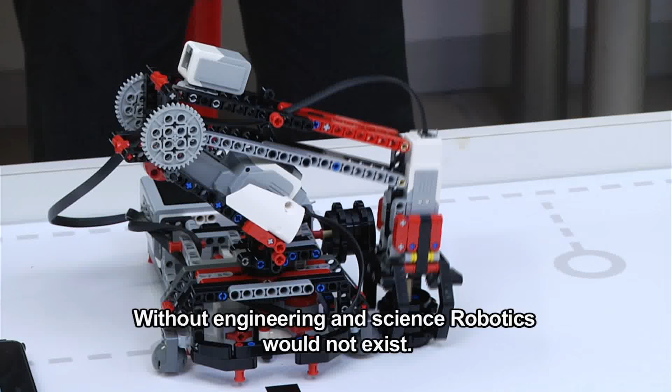Without engineering and science, robotics would not exist. Robotics includes mechanical engineering, electrical engineering, and computer science.

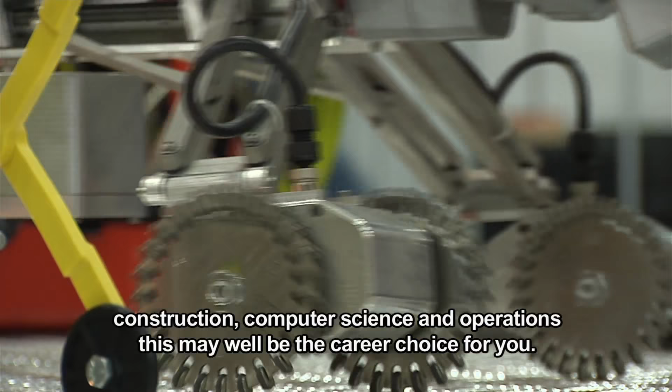Robots are used to make life safer, and yes, sometimes they do replace humans. So if you're not afraid of the future, are multi-talented and enjoy design, construction, computer science, and operations, this may well be the career choice for you.

Hi, I'm Donnie Haymans, Manager of Robotics at Hands-On Technologies.

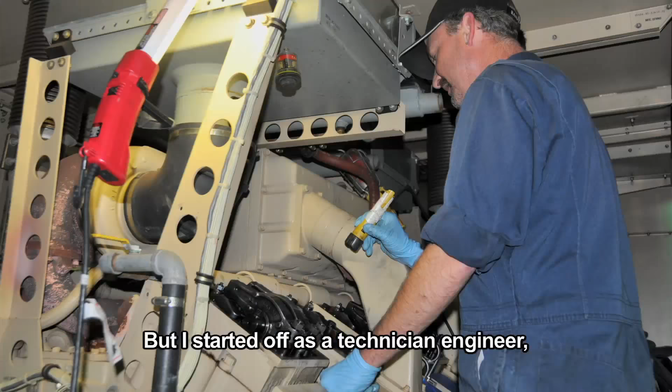Danny, how long have you been doing robotics? Okay, so I've been teaching and training robotics now for the last 6 years with Lego Education. But I started off as a technician engineer and I worked at the SABC. Then there wasn't robotics, but that was about 8 years, working on electrical equipment, cameras, videotape machines, etc.

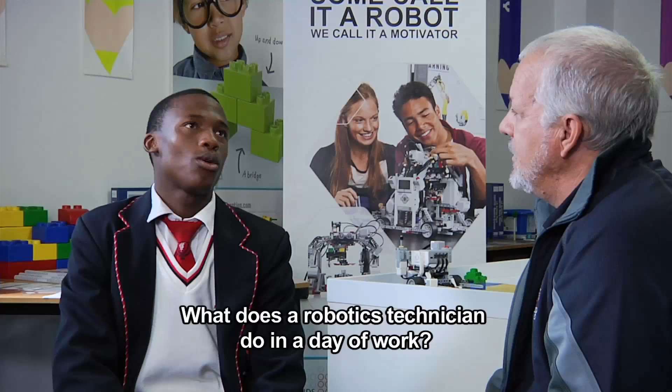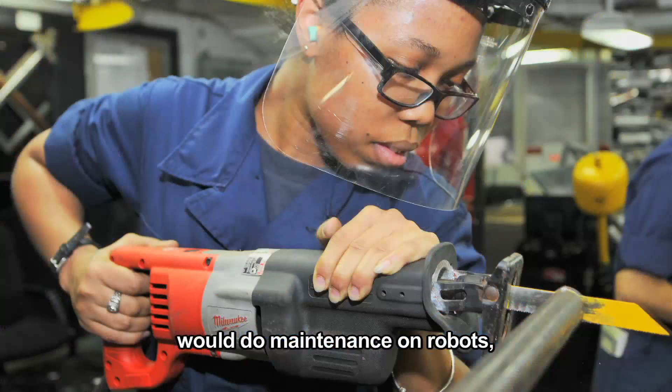Many years ago. What does a robotics technician do in a day of work? A robotics technician with electrical and mechanical experience and measuring experience would do maintenance on robots and all sorts of electrical equipment. But maintenance, testing, and obviously repairs.

You're still doing a robotics technician even now? I don't do repairs and maintenance anymore, okay. I've left that behind, I was that for a long time. I still do a little bit of fun at home, if something doesn't work I don't mind fiddling with it. But now I'm involved with education, robotics in education. And with that, what I do is we have robots which are good for school learners, matric learners, and tertiary education like yourself. I actually train the teachers to teach the learners on what robotics is.

The word robot comes from the Slavic word robota, which means labor. Nanobots are microscopic robots that are created in the biological context and are increasingly used in medical science. Researchers are working on nanobots that will be able to repair the human body from the inside.

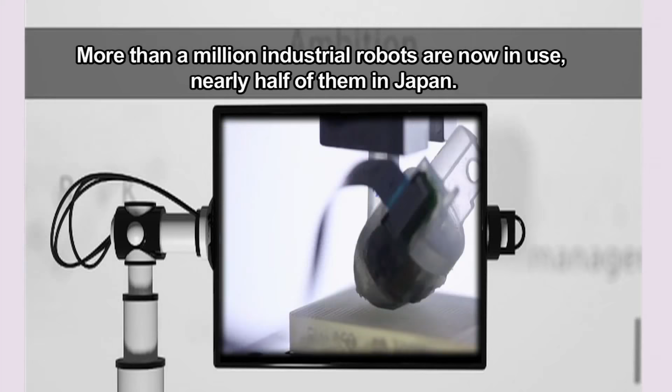More than 1 million industrial robots are now in use, nearly half of them in Japan. The Council for Scientific and Industrial Research developed a mining robot that assesses the mines after blasting to ensure the safety of miners.

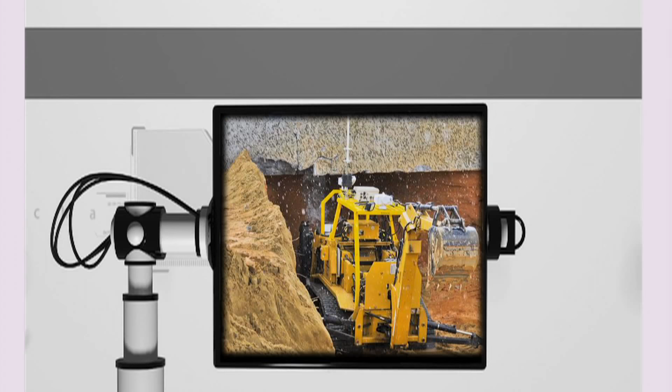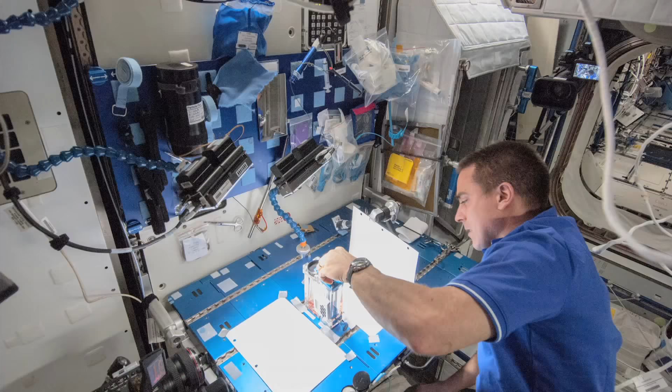After you have qualified, is there more training after? Yes, definitely. So effectively what happens is when you have a degree, you've got some experience, but when you get employed, you go into a specific field of engineering. And there's robotics now in every field of engineering, so robotics is very popular. Whether it's car manufacturing or any manufacturing field in engineering, really, there is robotics involved.

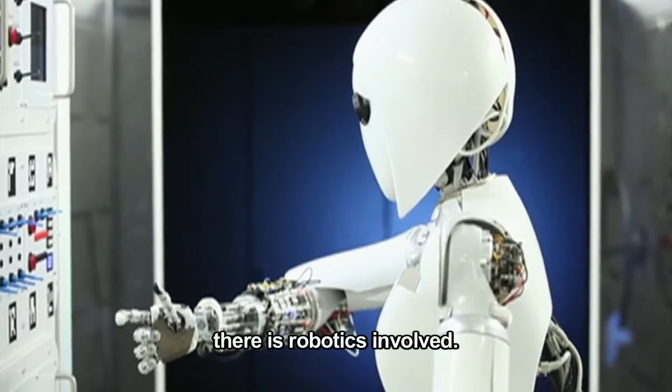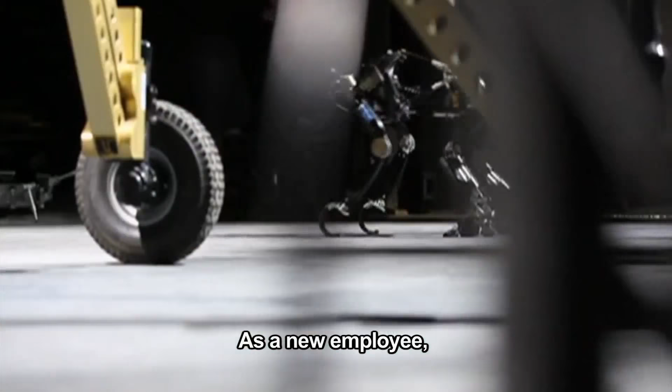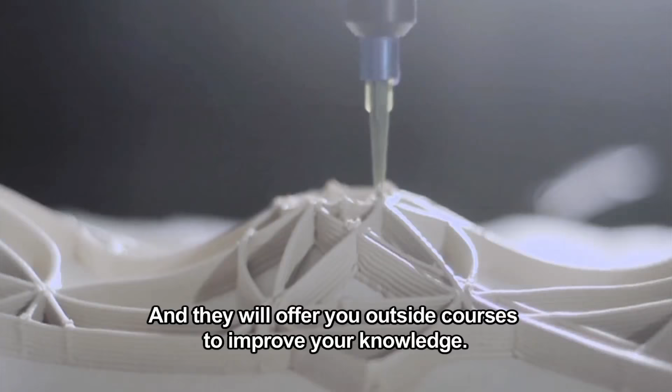Because there's programming and everything happens autonomously. Autonomously means that you push a button and the factory runs. So what happens is, you as a new person being employed, you will be put under the supervision of a senior technician or an engineer, and then they will lead you through the process. So you will get in-service training, you will learn how everything works. And then generally what they do is internally, they will offer you outside courses to go and do to improve your knowledge.

What interested you to go into robotics and engineering? Well, as a young boy, I was very interested to see how things worked, because of that interest. And when I opened things up, for example, and I didn't know what they were for, I just fiddled - that was more mechanical. When I was at Technikon studying after school, I started learning about voltages and currents and all the capacitors and resistors that were inside PC boards, etc.

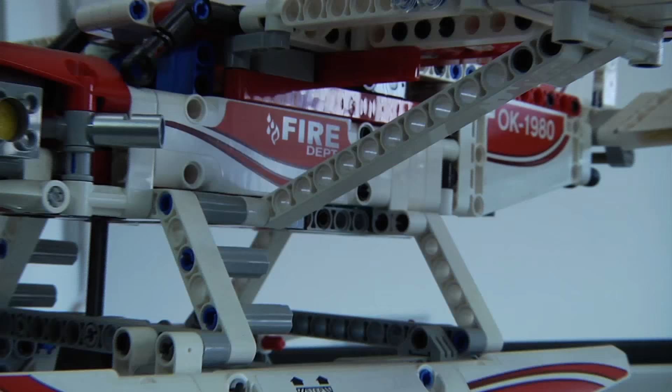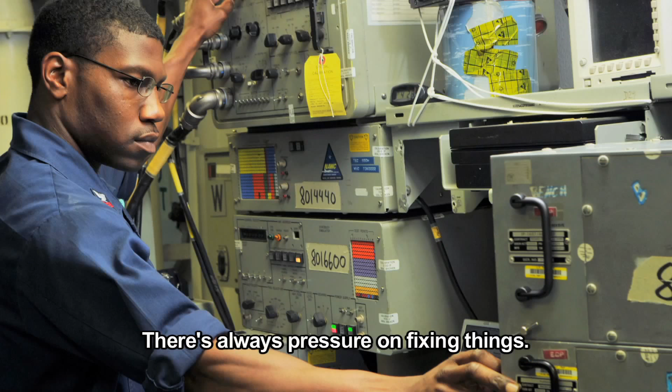What is the most challenging part of your job? As a robotics technician, obviously when you're fault finding, there's always pressure on fixing things. Generally, I think focusing and concentrating on what you have to do is the challenge, because it's so distracting.

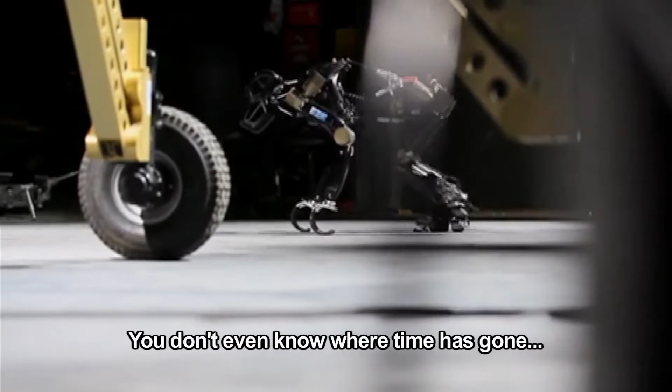In fact, you get so into a problem sometimes that 8 hours of the day fly by, and you don't even know where time has gone while you've been so deep into trying to solve a problem. Well, maintenance is actually easy.

It's only solving problems that's hard. What do you enjoy the most about the job? The most satisfying part about doing robotics, or working as a technician or an engineer, is actually solving something.

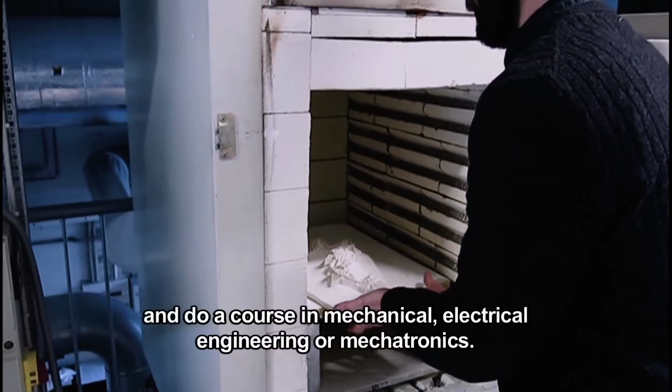What do you need to study to become a robotics technician? You would need to go to a university of technology and do a course in mechanical or electrical engineering, or mechatronics. Mechatronics is obviously a combination of the two, but with more programming.

What advice would you give me going forward? Work hard at school and then stimulate your mind with hobbies like robotics, things where you use your hands. The other very important thing you can do is if there's anything you don't know how it works, Google it, watch it on YouTube, because there are many answers about how things work there.

Now I've got a little robotics challenge for you. I know you've been doing robotics at school and worked on the NXT, but I've got a little EV3 challenge for you, just on how we're going to program a robot to move around and use some sensors. Let's go and see if you can do that, and I'll help you, don't worry. All right, go in front.

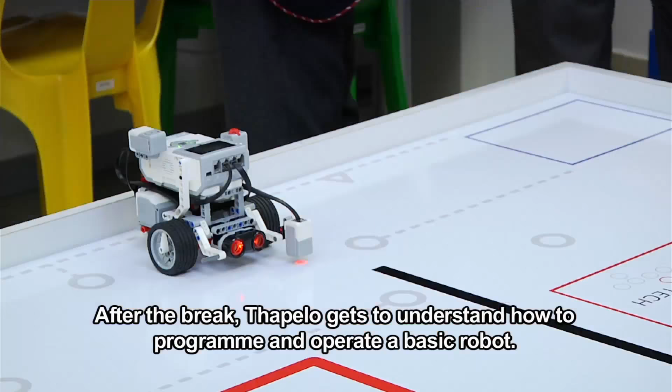Before the break, Thapelo arrived at Hands-On Tech and learned a bit about how robots function and how things work in the robotics business.

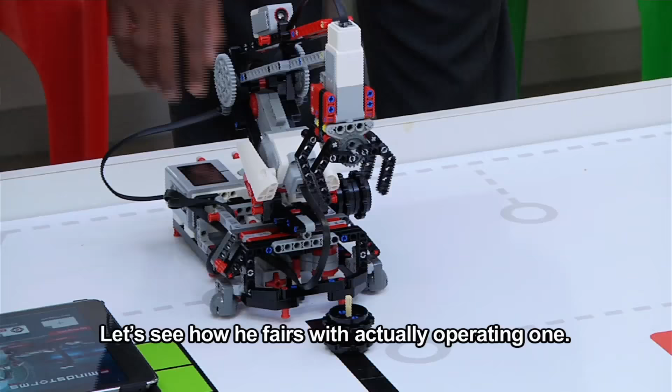Thapelo, this is the robotics training room, this is where we teach robotics, and we are going to have a little challenge that I told you about. You're going to do the challenge for us now. First, what we're going to do is use the laptop to do the programming.

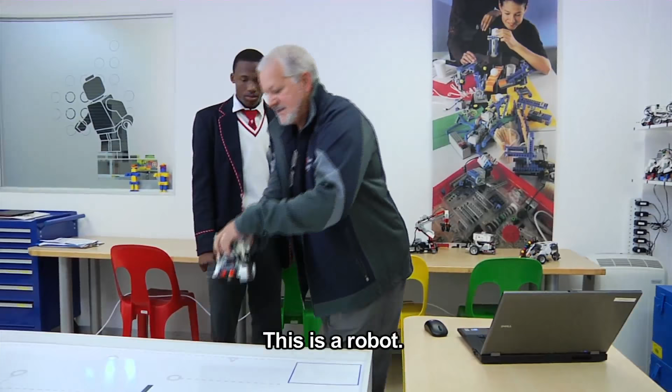We've connected this by Bluetooth just to make it a little bit easier. This effectively is a robot. What does a robot consist of? A robot consists of a processor, which is the brick, a mini computer, and then it has inputs and outputs.

The inputs on this robot are the sensors. For example, here we've got a color sensor, this is the ultrasonic sensor, this is an angle sensor, and this is the touch sensor.

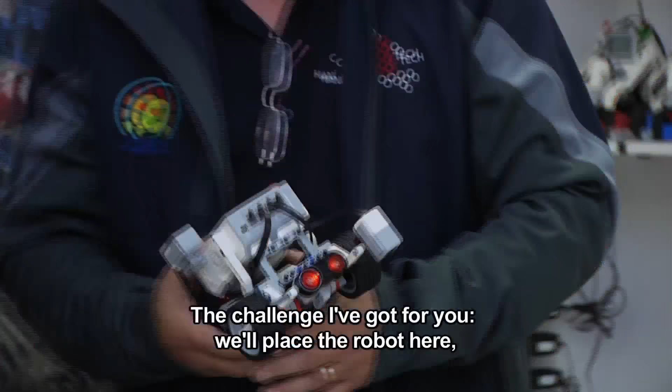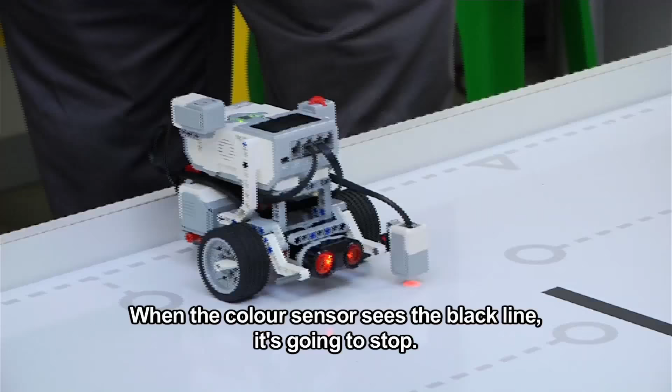The challenge I've got for you today is we're going to place the robot over here, and we're going to make this robot move. When the color sensor sees the black line, it's going to stop.

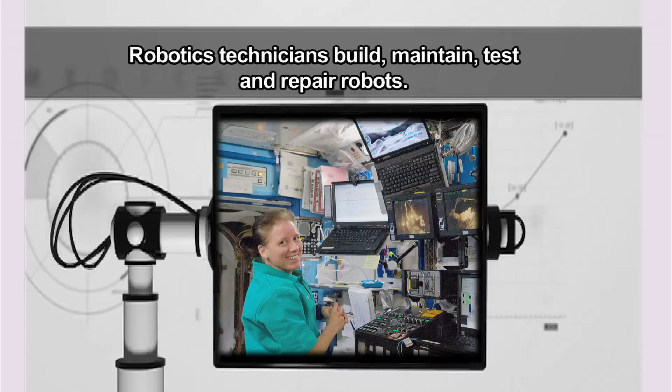Robotics technicians build, maintain, test and repair robots. They also work with robotics-related automated production systems, assembling robots and testing them, as well as writing computer programs to control and direct robots, which is a large part of the job.

What should you study to become a robotics technician? For starters, make sure you are working on your maths and science. A 4 to 5 year bachelor degree in engineering or a related field is required for most entry-level positions in robotics engineering.

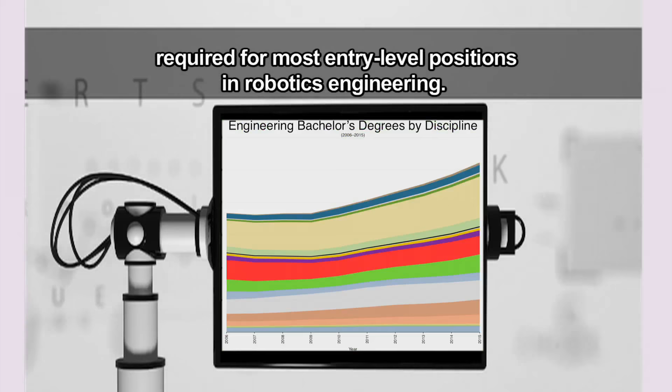Robotics South Africa is a non-profit body formed to promote the robotics industry in South Africa, especially to young people. So why not get in touch with them?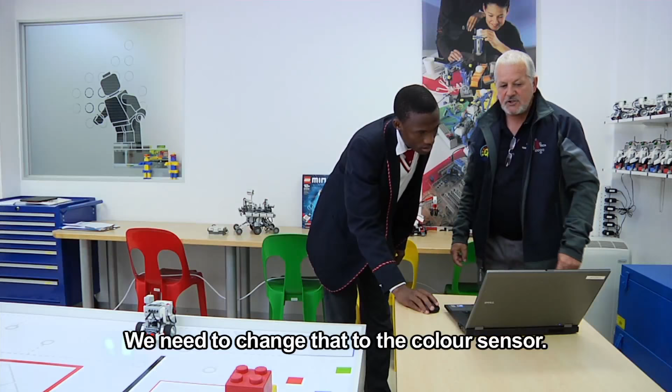Now the robot's going to move, and we need to change that to the color sensor, and choose the color and compare a color. Yes, you can use the color. And now over here, can you see, it's saying number 5, which is red actually. We want to change that to black. Good, so change it to black.

So now do you understand what's going to happen? Okay, so now we're going to play and download the same program. The robot will run, and if it sees the black line, it should stop, right?

Push it for us again, just to play, there we go. But now it's not running by itself. Why? Because we've put in the touch sensor. So you need to touch the touch sensor with your finger to start the robot. Okay, you can do it.

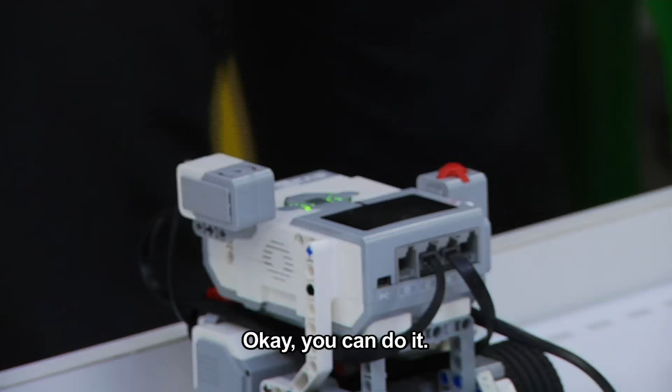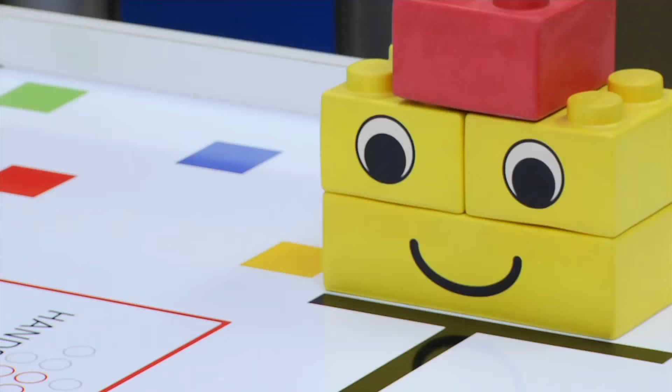Oh, that worked. But did you see where the color sensor is now? The robot didn't stop straight away, did it? So now we can get it to move forward continuously, but using which sensor? The ultrasonic sensor. Okay, good.

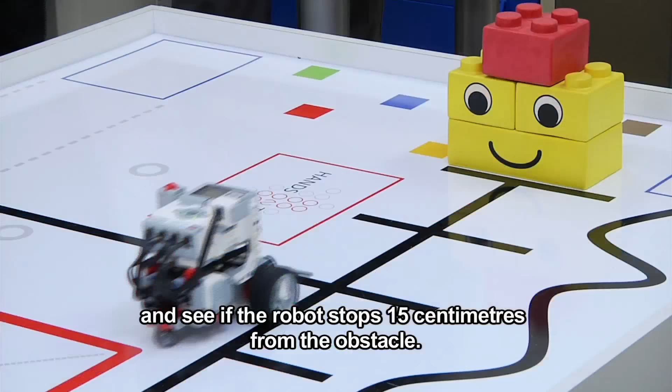So now we've selected this, and we can run it again. Let's see if the robot stops 15 centimeters from the obstacle. It's going. Yes! Give me five.

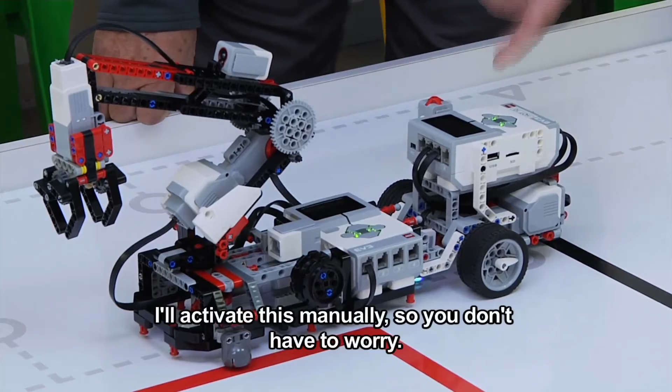Well done. Right, Thapelo, so what we're going to demonstrate now - we demonstrated this in a stationary position. Now what we're going to do is actually drive this whole unit on the factory floor to a point, using a driver robot that senses the black line so it has to stop at a certain place. I'm going to activate this manually so you don't have to worry.

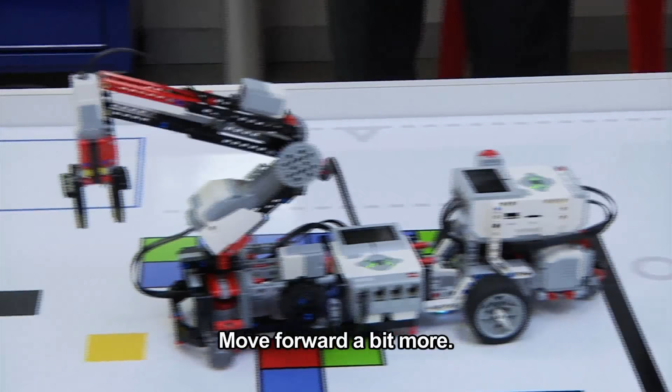Now, if this was lined up and planned the way we want it, it should be right underneath this position again. So now, to activate that and pick it up, you've got to push play again from here to run the autonomous part of the program.

There we go - arms opened up, picks up the object again. Well done, lifts it. Warning that the arm's coming left, for the engineer for example. Puts it down where it needs to be for the next step. The arm comes back to this position.

Do you understand that? Yes. Is it incredible? It is. It's amazing to see, hey? Okay, very good, well done.

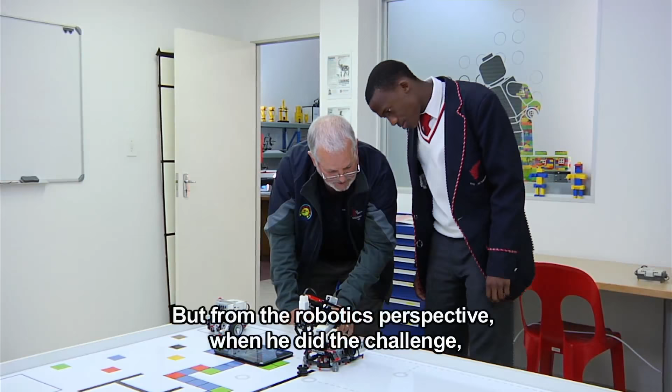Thapelo, as our prospective robotics technician - obviously a matric student - he's had a little introduction but asked me very, very good questions. I had to think back a little on some of those. From a robotics perspective, when he did the challenge he picked up on it really quickly and managed really well. The product is designed for learners at school to be able to do it easily. So, good candidate, nice young man, and I think the robotics industry would benefit from having him study and follow that career.

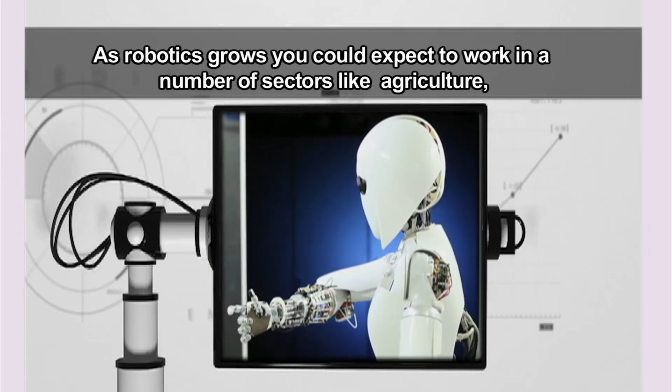As robotics grow, you could expect to work in a number of sectors like agriculture, manufacturing, mining, the automotive industry, healthcare, chemical processing, electronics, computer processing, and marine engineering. In short, the possibilities are endless.

How was that? It was a bit challenging, but yeah, you learned something. Yes. Okay, so work hard, qualify, and get into industry.

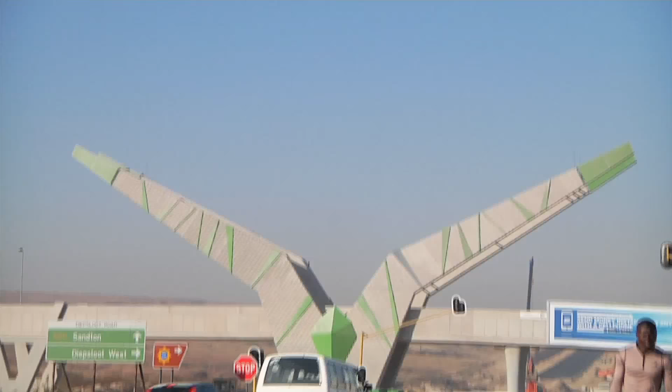Before the break, Thapelo got to learn more about the world of robotics. He even got to program and operate a few miniature robots.

Hi, my name is Ryan Beach. I am the CEO and founder of Ryonic, Africa's first robotics design and engineering company.

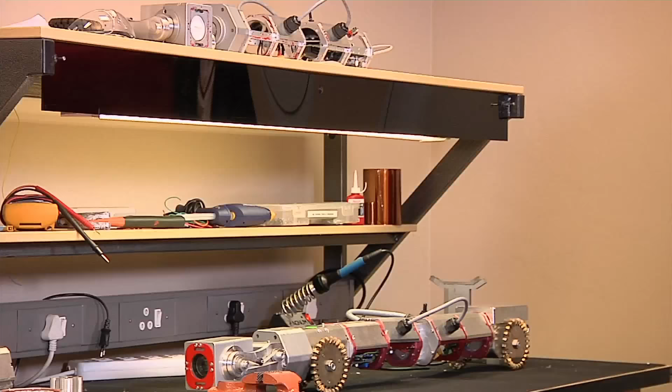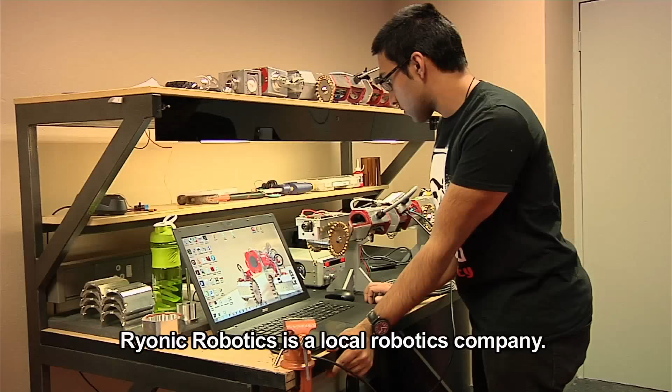What is Ryonic about? Ryonic is a local robotics company. We design and develop industrial robotic solutions. Our first focus is on inspection robotics. Yeah, that's it in a nutshell.

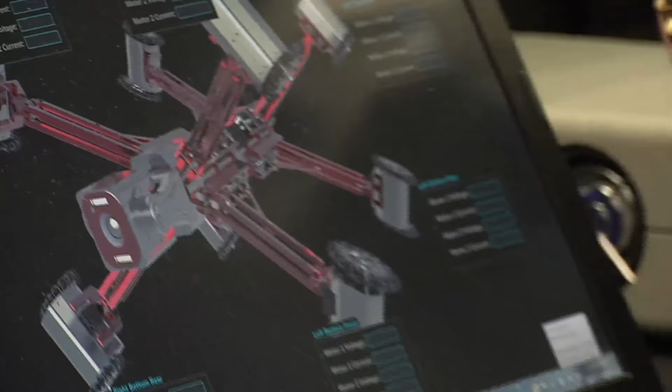When did you start your company? I started the company in 2014 and we got full traction in 2015.

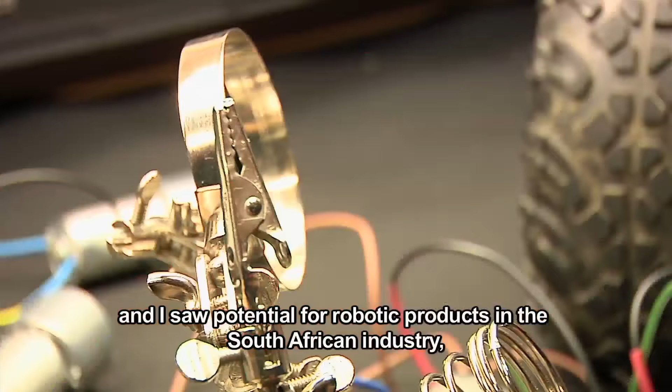Why did you choose to open this company? I've always loved robotics, technology and gadgets, and I saw potential for robotic products in the South African industry, various industries. So yeah, I saw potential and I decided to do it.

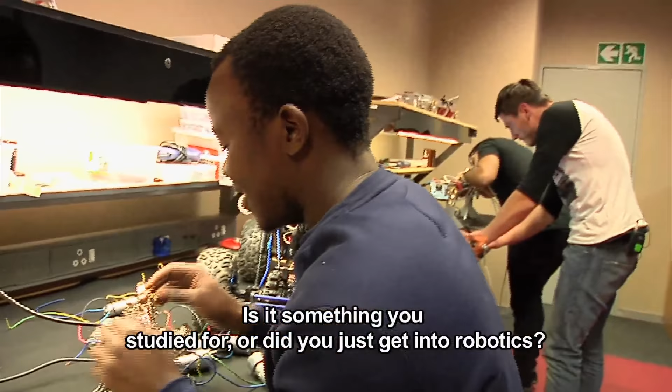Is it something that you studied for, or did you just get into robotics? I first studied civil engineering, and then when I started the company I did mechatronic engineering, and I'm currently doing industrial automation engineering. What challenges can I face when I want to start a robotics company?

Yeah, I'd probably say the biggest challenge is funding, because developing hardware specifically is very, very expensive. How easy is it to make money in this industry as a business owner? Not easy at all.

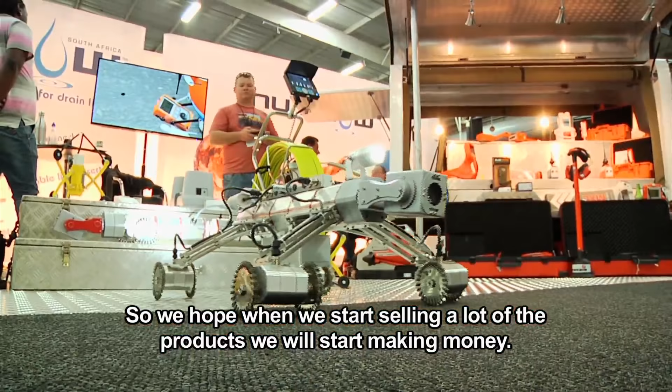Because the R&D and development takes so long and costs so much money - when we started this company, for the first couple of years you don't make money at all, because all your money and funding just goes into keeping the company going and developing products. So we're hoping that one day, when we start selling a lot of the products, we'll actually start making money.

There's a Robocop working in Dubai - do you think it's something that could work in South Africa? Security robots have been around for some time. I think the first one was released in 2004, but I know there's currently about 8 variations. I think the Knightscope was the one that's now being used in Dubai. We're actually looking into a security robot ourselves as a future project, but it's definitely a very good solution for surveillance and security.

I'll hand you over to Rick, our lead roboticist and head of engineering, and he'll be able to tell you more about the technical side. Thank you.

Yes, yeah, I like it. Rick, how are you doing? Good, and this is Thapelo. Thapelo, how are you? I'm going to hand him over to you.

Rick is our lead roboticist and head of engineering, so he'll take you through some of the more technical stuff. Can you follow me this way? All right, let's go.

All right, Thapelo, welcome to the assembly room. This is where we kind of give birth to the robots. We assemble them here from all the parts that we machine in the machine shop. This is where the guys assemble the robots and test them so that we're very comfortable with them going out into the field and performing the job as they're supposed to.

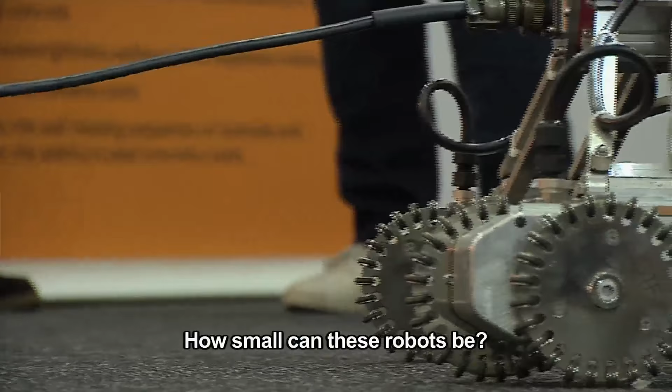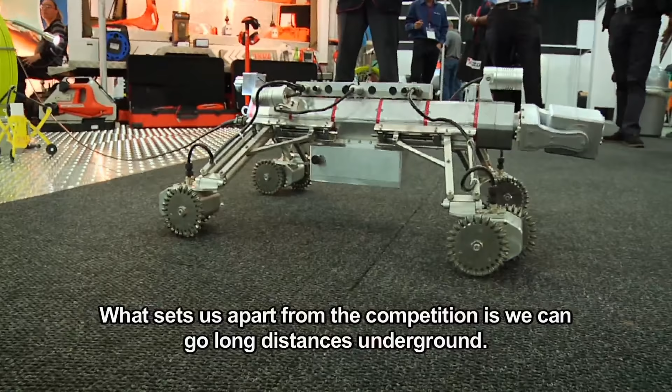How small can these robots actually be? These robots are, at this stage, bigger than they need to be. Basically, the challenge, what sets us apart from the competition, is that even with a small robot we can go long distances underground.

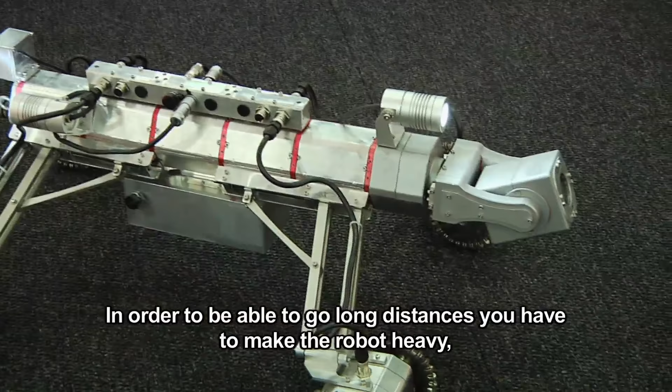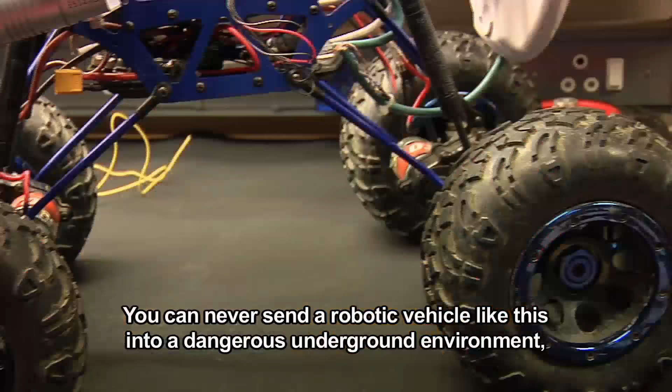So in order to go long distances, you have to make the robot heavy, because we need to drag either a power cable behind the robot or a safety line if you operate it in wireless mode. You can never send a robotic vehicle like this into a dangerous underground environment, like a pipe or stormwater drain, without attaching a safety line. If something goes wrong underground inside the pipe, the water starts flowing suddenly, or the robot gets stuck, you always need a way to retrieve the robot, because it's an expensive piece of machinery. You always need the ability to recover the vehicle if something should go wrong.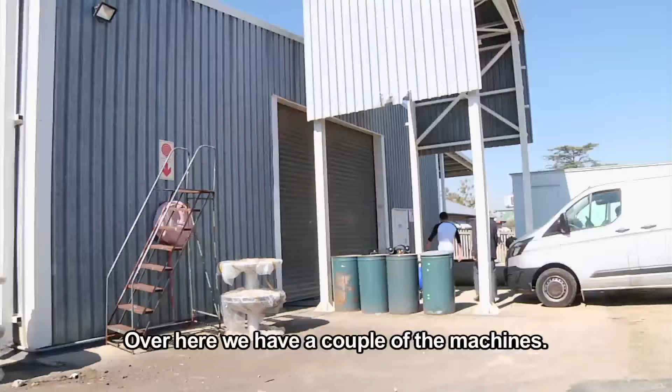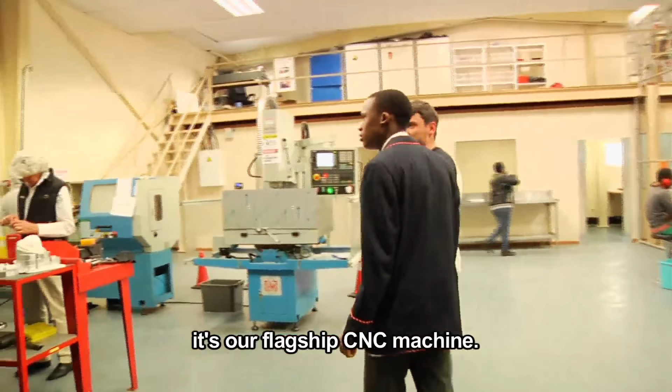All right, so over here we have a couple of the machines. You'll see this is the Hurco. This is our big machine, our flagship CNC machine. This is where we take raw material and produce our parts for our robots.

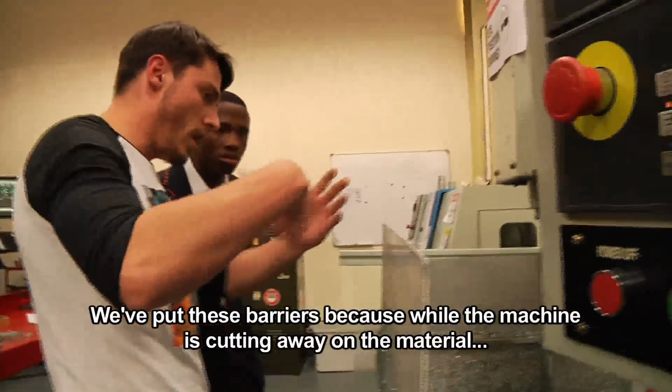So this is also a CNC machine. You'll see we put up these barriers because while the machine is cutting away on the material and spraying the lubricant so the tip doesn't overheat, it basically sprays metal shavings. So whenever you're at this machine while they're operating, it's very important for safety—you have to have your safety goggles, you have to have your earmuffs, you always need protection when working with these heavy machines.

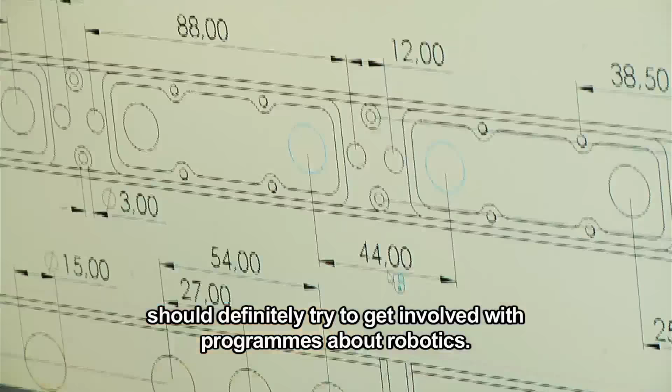Robotics is definitely growing in South Africa, especially at the secondary level, in high schools across the country. I believe students currently in high school wanting to get into the field should try to get involved with programs about robotics. These days you have the First Lego League, the First Tech Challenge, all of these programs running around the country, giving students the ability to start learning about robotics, learning about the field and the challenges, and it guides them toward their career choice in the future.

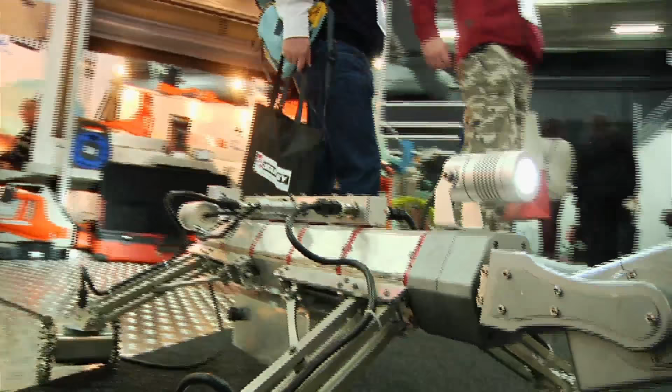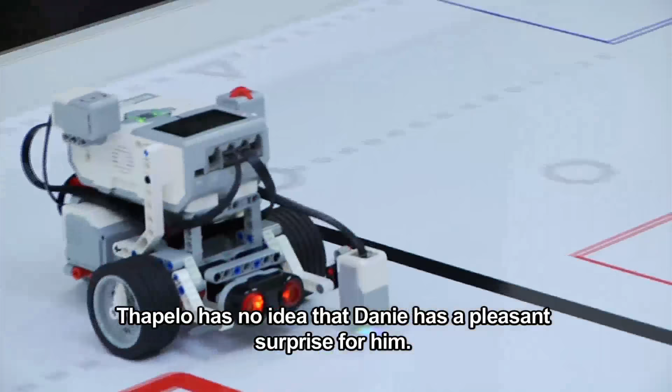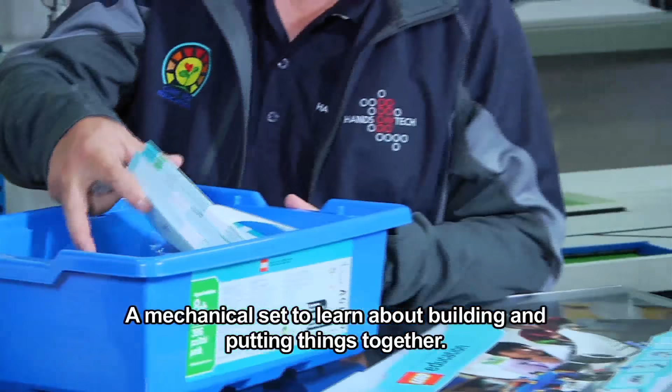I'm going to tear this open, and I want you to take it out so we can have a look at what's inside. Just remove the box for me, just hold that. I'm going to put this aside and open it. It's a mechanical set to learn about building and putting things together. Inside here are lots of books, and different models that you can build. There's a battery pack with the motor so you can make it move, and also a flash drive with some manuals which will help you learn how to use these things.

Good man, thank you.